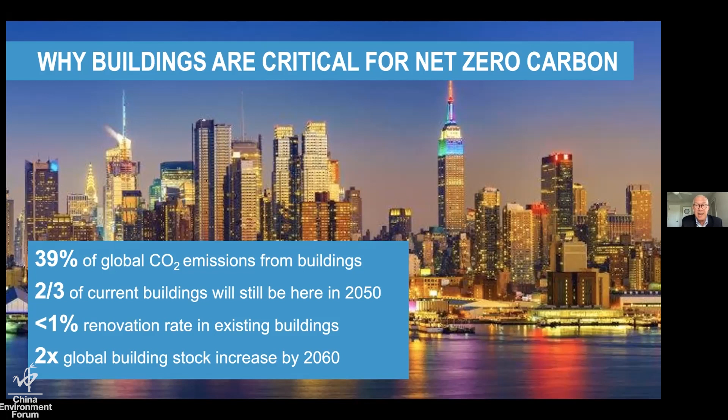Well, how much is it? Imagine what you're looking at, which is New York City. Imagine building a New York City every month for the next 40 years. That's what we have to do. So this is not a little bit of energy efficiency. This is a lot of energy efficiency.

So what is the pathway towards net zero? In order to decarbonize the economy by 2050, we have to decarbonize our electrical grid, and we have to do that very quickly. The Biden administration has put out a goal of zero carbon electricity by 2035. That's very ambitious, and many countries around the world have made similar decarbonization goals for their electric grid.

But we need to not just decarbonize the grid, we need to decarbonize buildings, transportation, and industry. Industry's tough—very high temperatures are required in a lot of industrial processing. We can electrify some of industry with high temperature heat pumps and similar technologies, but it's going to be a little more challenging. That may be where renewable natural gas comes in, or green hydrogen, as a way of addressing that sector.

Transportation's pretty easy for light and medium duty vehicles through electrification, EVs. Of course, airplanes are going to be a little more difficult. Maybe we need biofuels there.

In buildings, electrification means electrifying heating, space heating, water heating, as well as cooking. There is existing technology available to do that. It's not as widely applied as needed, but there are breakthroughs—heat pumps that work at lower temperatures, and heat pumps that work at higher temperatures to provide heating for commercial and institutional buildings. So electrification is going to be key.

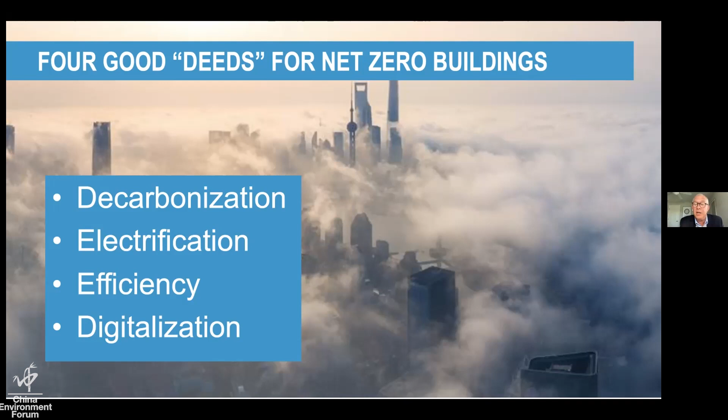Now what I'd like to do is show a couple examples around the world of how you can apply the four good deeds to achieve or approach net zero.

This is a building in Hawaii—this is a pleasant sight indeed. This is Maui College, the first college in the United States to be 100% renewable on site. It can island itself from the grid in Hawaii, which is generally fossil fuel powered through fuel oil shipped in from far away. This is because the university system made a commitment to be net zero by 2035, following the governor's lead. This is the classic approach to existing buildings on the pathway to net zero.

First, energy efficiency improvements: HVAC, lighting, new controls, 45% reduction across the entire campus on energy use. That's the first step. The second step, on-site renewables: 2.8 megawatts of solar PV, and even more interesting, 13.2 megawatt hours of battery storage. That sounds like a lot, but that's because there aren't any feed-in tariffs in Hawaii. If you make excess during the day, and you do in Hawaii because it's pretty sunny, you don't get paid for it.

So policy can be a big driver of net zero. In this particular case, we needed lots of battery storage. Once you have PV and storage and EV charging, you can put together a microgrid and manage that facility off the grid. In fact, they're selling services back to the utility: grid regulation, frequency regulation, spinning reserves, and getting paid very kindly for it.

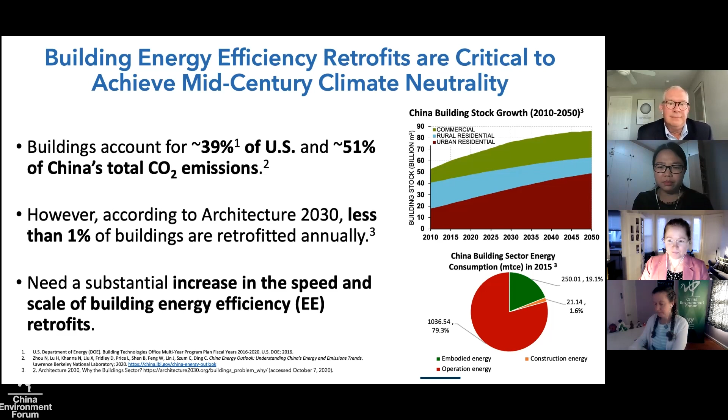One of the key strategies to addressing the climate crisis is building energy efficiency retrofits. However, there are problems. In-person audits are pretty expensive, about 10 cents per square foot for a basic walkthrough and analysis of utility bills, according to ASHRAE. They also pose health risks - during this pandemic crisis, most auditors and contractors weren't able to get into buildings. On the flip side, there are an increasing number of remote energy analysis tools to target buildings for retrofits, but most of these tools require domain expertise. Simulation and modeling is time-consuming and complex.

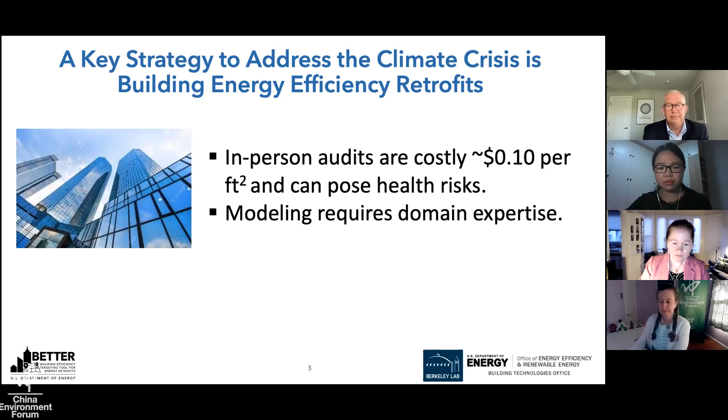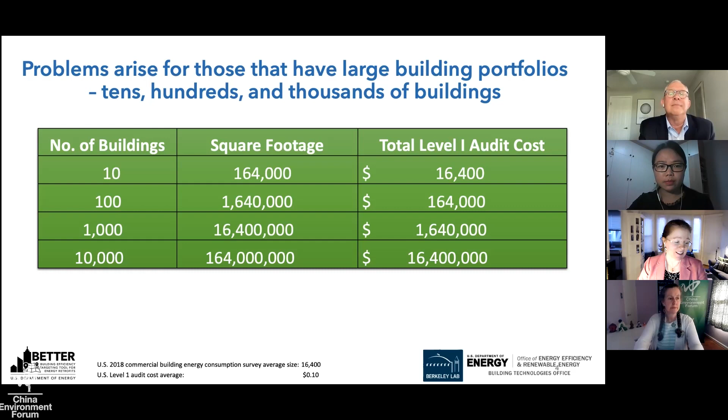So the researchers at Lawrence Berkeley National Lab, with support from the US Department of Energy - the challenge arises for those with large building portfolios, tens, hundreds, thousands of buildings. There are a lot of these entities out there. I think about the state of California, which has a 500 building portfolio for courthouses. The price of level 1 basic audits for those buildings would be more than $500,000. And as we increase the size of the portfolio, we increase the cost associated with audits.

So the solution: the US Department of Energy and Lawrence Berkeley National Lab, in collaboration with Johnson Controls, have introduced the Building Efficiency Targeting tool for energy retrofits. This is a lightweight web app that replaces the basic level 1 audit and streamlines level 2 audits. On top of that, it uncovers simple, no-cost or low-cost measures to cut energy costs in buildings about 5 to 10% portfolio-wide - we're focused on portfolios here. Better is very easy to use - simple inputs: building type, location, gross floor area, and 12 consecutive months of energy consumption, both electric and fossil.

Better does a very quick analysis. We use change point models. We isolate the coefficients in the change point models. We benchmark them against peers. And we use that information to provide actionable portfolio level insights to improve energy usage,

You can see here from the actionable portfolio insights picture, we're looking at an office building portfolio with about 26 buildings. Very substantial cost savings available, about 20%, $2.5 million on an annual basis. What Better also does is provide users with the top 5 energy efficiency actions they can take to capture those savings. And most of these are no-cost, low-cost operational improvements, along with some technology and structural recommendations.

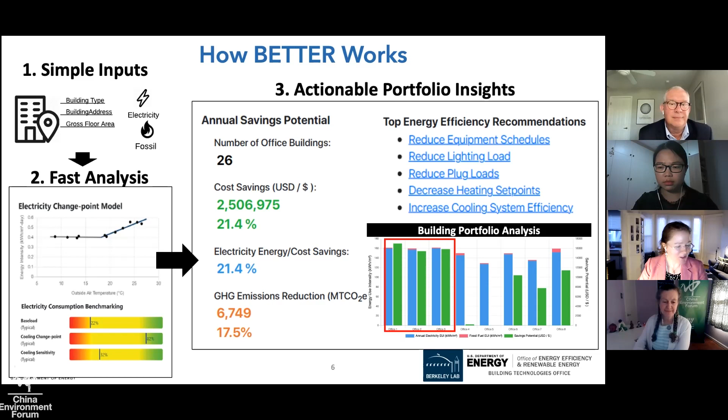And it also, third on that graphic there in the lower right-hand corner, the tool tells you precisely which buildings in a portfolio offer the highest cost, energy, and carbon savings. So you can zero in on those buildings as well as the systems and equipment that need to be improved.

So I can promise you there are a lot of our clients and colleagues with buildings, large portfolios in these cities that are really sweating bullets. There are fines for not complying. When you think about the New York City restaurant letter grading system and the impact that had on attendance or visits to restaurants, and they're quite nervous.

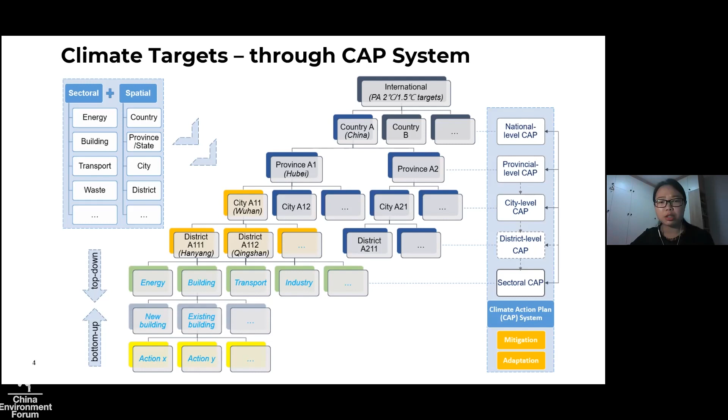How will these targets be delivered? There is a CAP system, the Climate Action Plan system. This is a simple diagram showing the process, from the top targets for climate change at the global level, which is the Paris Agreement targets for now, delivered down to the countries, for example China, then going top down from country level to provincial level to city level, then to district level. There's a spatial line for each level, and there should be a CAP, a climate action plan, to deliver their climate targets. At the same time, there will also be sectoral climate action plans, including energy sector, building, transport, waste, etc. In each climate action plan, both mitigation and adaptation targets and actions should be considered.

Today we basically focus on the building sector. As we all know, and as both Clay and Carolyn mentioned a little bit, the share of the building sector in final energy and emissions - we can see from the IEA data that globally, when we consider both operational phase and construction phase, the building sector is responsible for 35% of total final energy consumption and 38% of total CO2 emissions. In China, these numbers are larger than the global average.

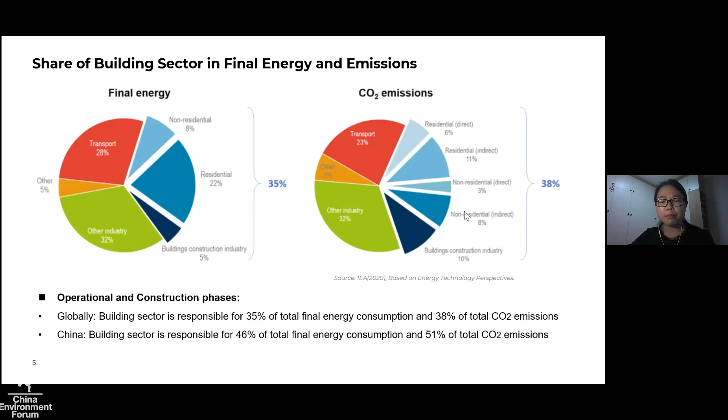But when we come into details for China, mostly we consider the operational phase more in most occasions, because embodied emissions are just an emerging topic in China. So when we consider operational emissions from the building sector, we can see in China the current data is about 22%, while the US should be 35. I just saw Carolyn shared a 39, and the EU will be around 40%. We can see the gap between China and the Western developed countries, which also indicates rising room for Chinese building sector emissions.

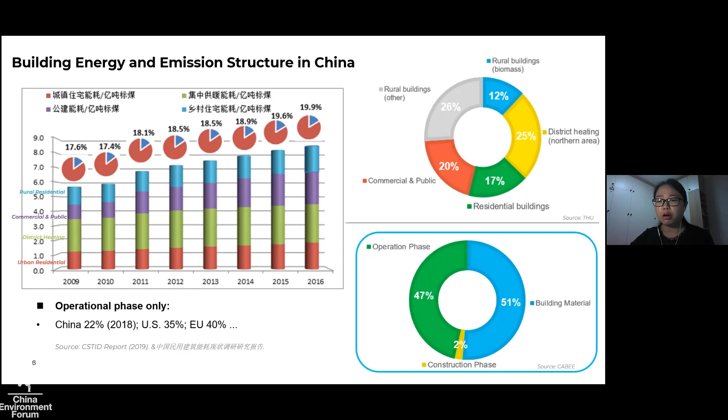The right diagram shows the structure of these emissions and energy consumption from the building sector. We can also see the number Carolyn mentioned, the 51% of total CO2 emissions, actually included building materials, which were calculated into industry emissions in China at this moment. But now, because of the 30-60 targets, the building sector is starting to consider both the operational phase and the building material and construction period phase as a whole. These numbers all show the whole picture of the building sector.

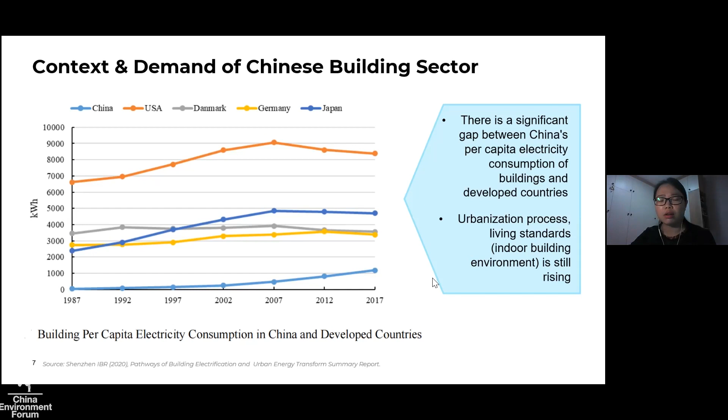Another diagram I'd like to share gives a wider context for the Chinese building sector. We all know China is the largest CO2 emitter in the world now, but when we compare its building per capita electricity consumption with developed countries, we see a significant gap between China and developed countries. This indicates that China is still in the process of urbanization, and living standards, including indoor building environment, are still rising. This indicates a large room to rise in this sector in China, and poses a large challenge for the Chinese building sector to peak its CO2 emissions and achieve the neutrality goal as soon as possible.

So in China, with my information, there are currently some strategic pathways towards decarbonization that I'd like to quickly share.

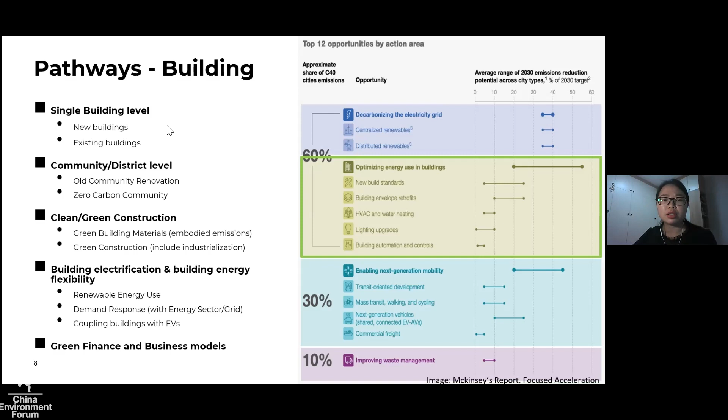The first is from the single building or individual building level. For new buildings, as Clay said, there are a large number of new buildings constructed every year worldwide, as well as in China. So the most efficient way to improve new buildings' energy efficiency is through building energy efficiency codes or standards.

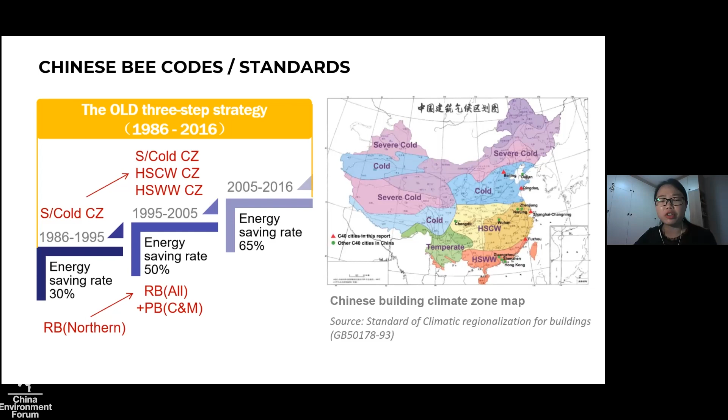China has 5 climate zones. From 1986, China has had its first building energy design standards, and afterwards a strategy we call the 3-step strategy. Now the 3 steps have totally finished, and with them China built its building energy efficiency standard system, which is quite mature now.

It covers both residential buildings and commercial and municipal buildings. These two building types in China together are called public buildings, and it includes national level standards, which indicate the minimum mandatory level, and also local standards, which must be higher energy efficiency than the national one. It has mandatory and voluntary standards, covering the whole climate zones and the whole process from design to construction to operation and even renovation.

Another characteristic in China is that, together with the building energy efficiency standards, China is also parallelly adopting green building standards at the same time.

With the three-step strategy completed, China now has new targets and new strategies, adopting nearly zero energy buildings. There's also another mandatory standard named the General Planning for Building Energy Efficiency and Renewable Energy, which is going to be released this year.

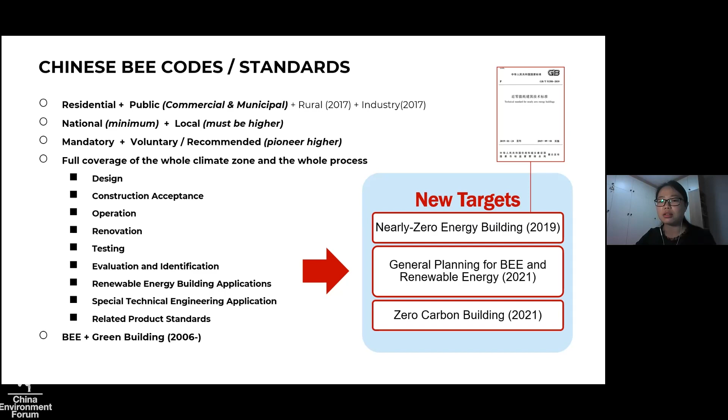These standards were accelerated by the 30-60 targets. I'd also like to quickly mention this program: the C40 China Building Program pilot city, Beijing.

Its focus area is new residential building energy efficiency improvement. It released China's first design standard for ultra-low energy residential buildings, and it works well, with an energy saving rate of more than 90%.

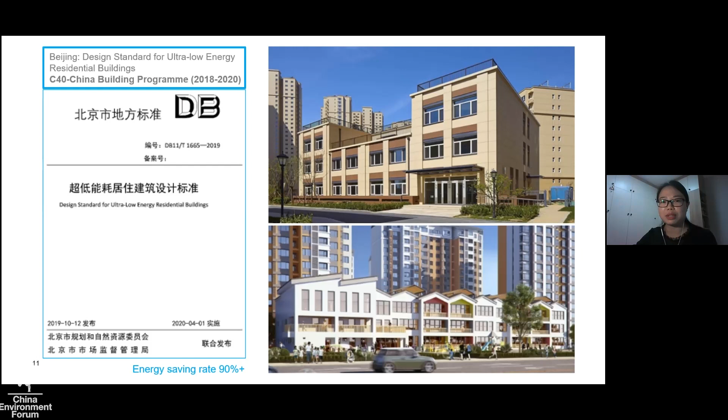For existing buildings, I'm so happy to hear both Clay and Carolyn share the pathways and tools for existing buildings. I'd like to quickly go through some works or policies underway in China.

The Chinese government initiated large-scale renovation programs for both residential buildings and existing commercial and public buildings. Large-scale buildings have finished their renovation, but this work will become routine in the coming years, because once a building is constructed, it becomes an existing building and needs to improve energy efficiency step by step, unless the building is designed, constructed and operated as a net zero carbon building.

The second one is the quota system. Beijing, as the first city in China, implemented a mandatory quota system for its existing commercial and public buildings over 3,000 square meters. This cut down a lot of CO2 emissions, and this policy will continue in the coming years and become more and more stringent.

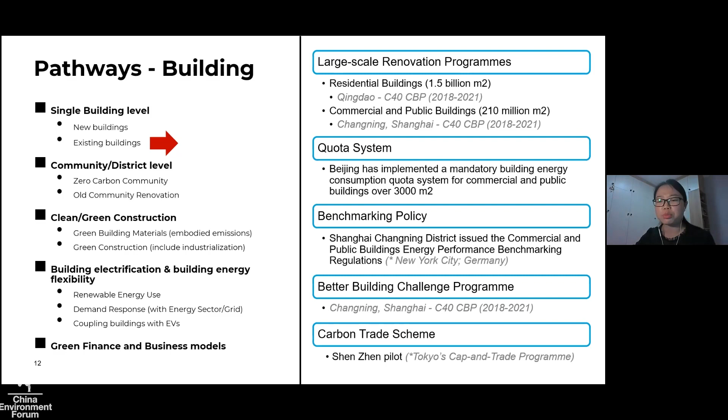The last one I'd like to mention is the carbon trade scheme. Shenzhen piloted the building carbon trade scheme in China a few years ago, but I think we could learn more from cities like Tokyo's cap and trade program to improve existing buildings' performance more.

Except the single building level works and actions, Chinese government and local cities have also started to focus on community or district level energy efficiency, moving from single building to regional scale. So the new targets, together with single building standards, will include zero carbon community assessment standards.

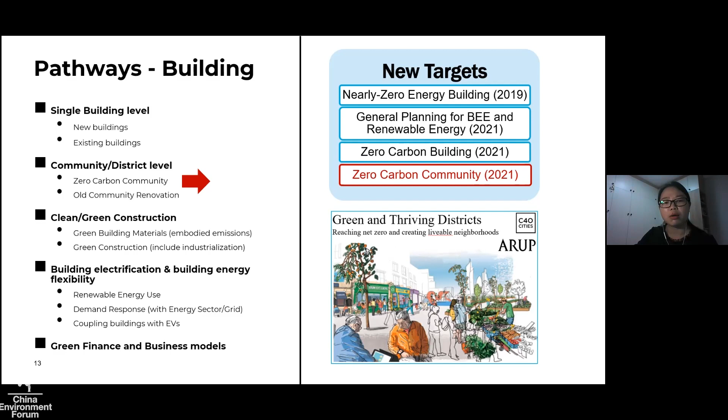This has already started and will be finished within this year. Also, C40 is working with Arup on developing a global guidebook on green and thriving districts, reaching net zero and creating livable neighborhoods. These are all very valuable practices and efforts towards zero carbon communities, especially for new communities.

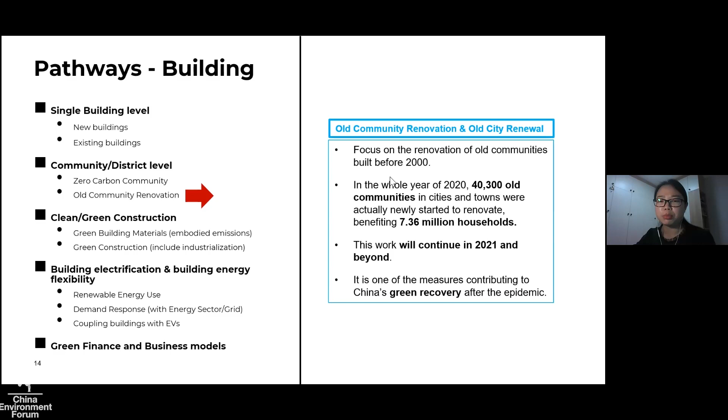And for old communities, in China we now have old community renovation and old city renewal programs, which focus on the renovation of old communities built before 2000, and it works very well. I'd like to show a few pictures of what has been done under this program, a lot of communities have benefited through this.

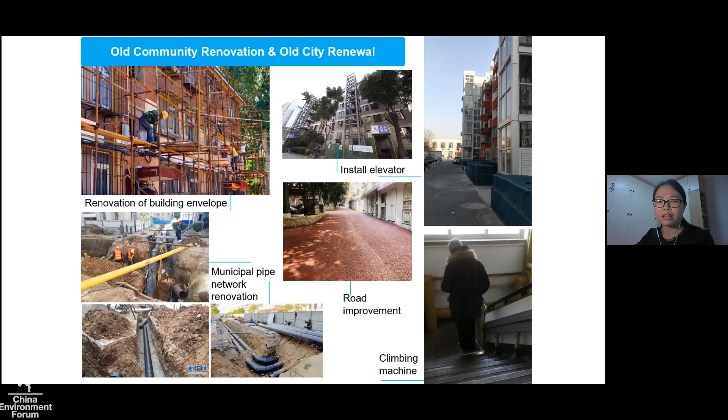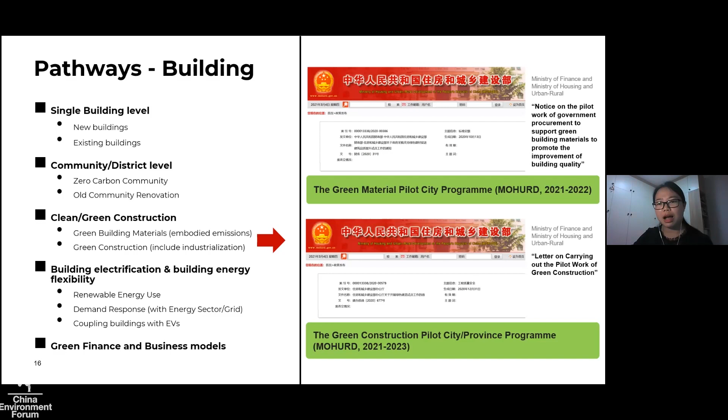And the third emerging area is clean or green construction. This is targeting the embodied emissions in the building sector. The Chinese government's Ministry of Housing and Urban Rural Development initiated two pilot programs last December: one is the green building materials pilot city program, and the other is the green construction pilot city and province program. These are all emerging new focus areas.

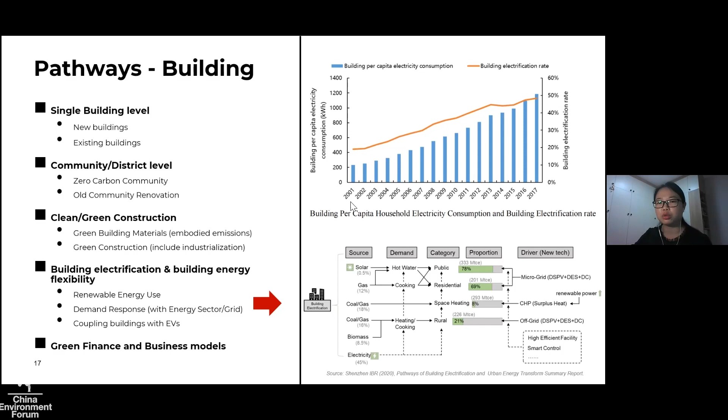The fourth one is building electrification and building energy flexibility. I think Clay made very good points on this aspect, so I'd like to skip this one, but just mention that the Chinese building electrification rate has been rising through the past two decades and will continue to grow.

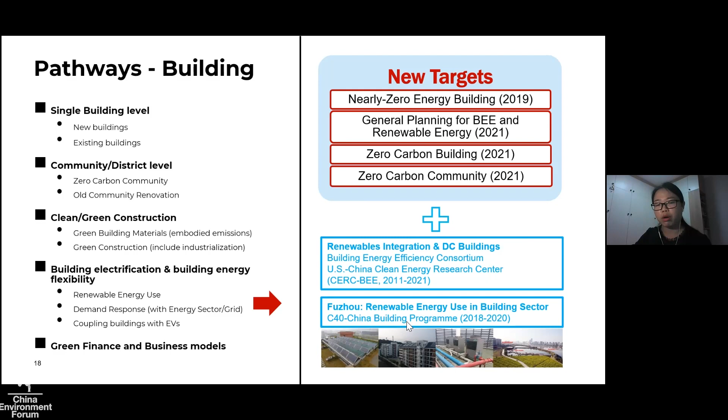In this area we also need to consider renewable energy use, especially solar PV plus storage, which will be a solution for net zero carbon buildings. We've also seen a lot of cooperation between Chinese cities and international cities. For example, under CERC-BEE, there was renewable integration and DC buildings collaboration. And under the C40 China building program, we also see renewable energy use in building sector pilot cities.

The last area is green finance and business models or market-oriented mechanisms, which could provide solutions for the financing issue of building sector decarbonization. Green finance is a new topic and new focus for Chinese cities, and central MOHURD also has some pilot cities in this area, like Huzhou and Qingdao.

Together with green finance and this kind of innovation, public policy from different levels of government also needs to be optimized in the coming years, for example subsidies, tax incentives, or other supportive public policies.

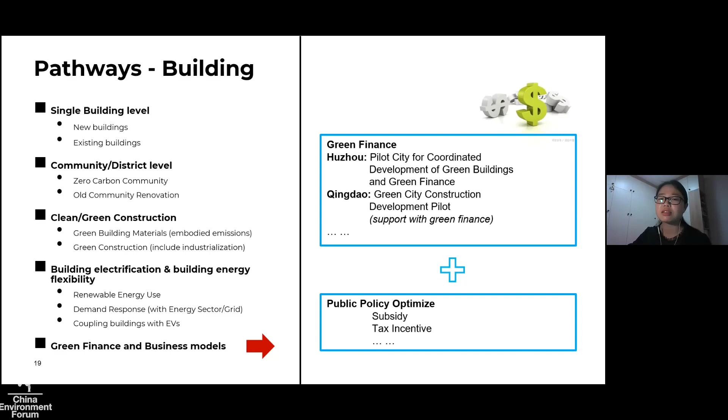Regarding US-China cooperation, we all see positive signals from the US-China joint statement addressing the climate crisis, and one of the eight areas is energy efficient buildings. So I'm very positive to see the cooperation coming from both countries, and look forward to participating more with partners from both sides. Thank you, Jennifer.

Thank you, Jing. Yeah, that's a pretty slide, but wow, I like ending on an optimistic note. I think it was really helpful, Jing, that you really mapped out, basically—Clay's nodding—everything that needs to happen.

One place to start—maybe Clay or Carolyn, you can jump in here. One of the last things she talked about was green finance and some of the plans that are there. We know here in the US that the Biden administration has been talking about wanting to imbue carbon neutrality work across all sectors. What are we seeing at the federal or state level in terms of financing for some of this? Because a lot of the things you were talking about, Clay, weren't low cost or no cost.